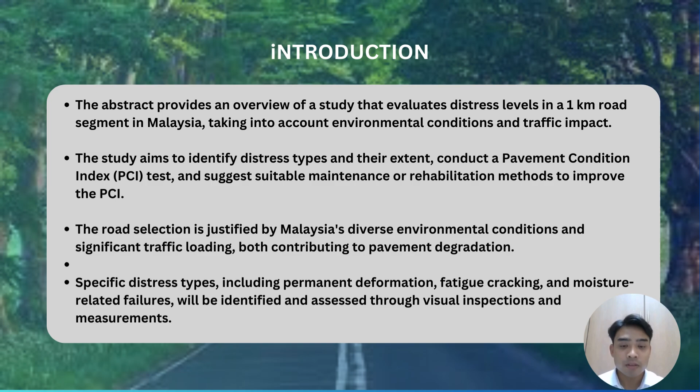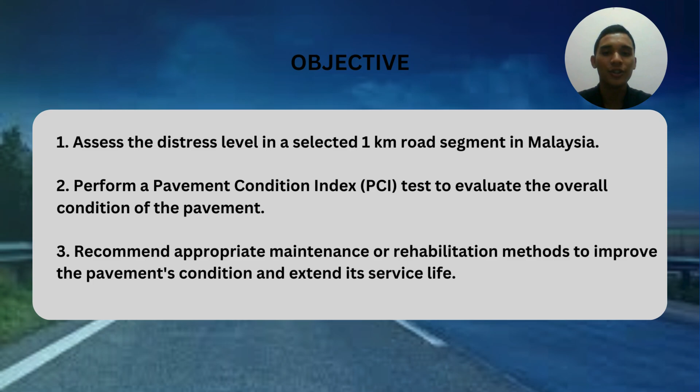My name is Muhammad Fikri Mafarid and I will talk about the location and study area of our case study. First of all, we must search and try to find a road in Parit Raja that has distress on that road. We pick and find the distress on Jalan Parit Haji Hassan, which is near SMK Seri Gading, and the road leads the way towards the city of Batu Pahat.

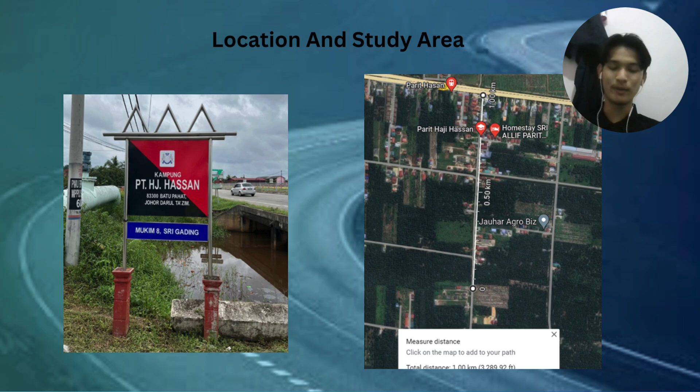Okay, for the problem statement, most of the Malaysian roads, including expressways and rural roads, were built using either flexible pavement or rigid pavement. For flexible pavement, we have 5 layers: subgrade, subbase, base, binder course, and the wearing course. For the rigid pavement, we have 3 layers only, which is the subgrade, base, and the concrete slab on the top of base.

For this study, the main road of the area of our case study is using a rigid pavement. Rigid pavement, or commonly referred to as concrete pavement, is a road structure that gives a hard and lasting surface for vehicle transportation.

This problem concerns highway engineering, particularly concrete-based structures, in regard to difficulties associated with rigid pavement. The major concerns include longevity of rigid pavement, in particular with respect to reducing distress, including cracking and degradation of joints.

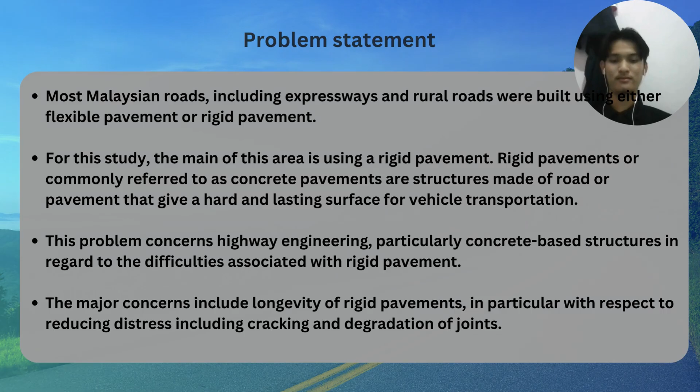Literature review. Pavement Condition Index, the PCI, is one of the assessments to know the condition of the road to help the process of maintenance and rehabilitation, which aim to sustain the quality of the road. The PCI method is used to obtain a PCI value for the road through a visual survey of the road that we do in our case study.

The more crucial factor is improved road condition, as it guarantees user safety and is safe for all users like motorcyclists, car drivers, and so on.

The PCI is a numerical rating of pavement condition that ranges from 0 to 100. In the PCI rating scale, 0 is known as the worst condition, and 100 is known as the good condition. When you get a PCI value between 80 to 100, it means that the road is safe to use and the condition is good.

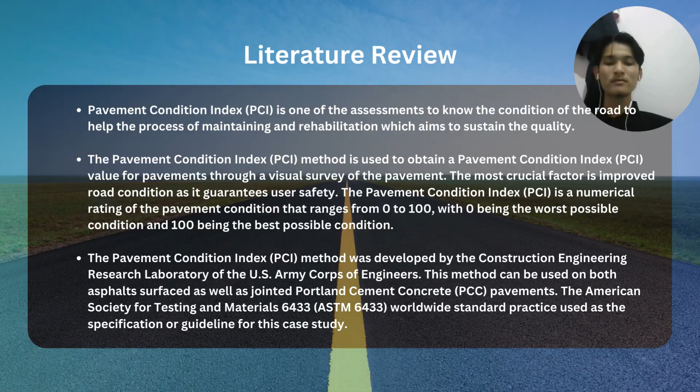Hi, Assalamualaikum. My name is Muhammad Nasir Tawwa bin Muhammad Razwan, and my registration number is CF220128. Okay, for my part, I will explain about the methodology for our project. Okay, the first one is start project.

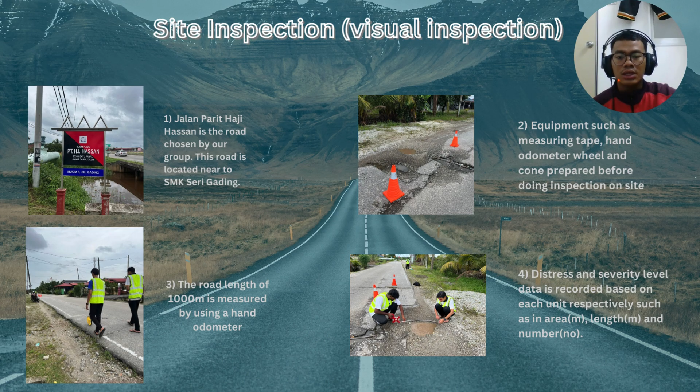Next is site inspection, which is visual inspection. Firstly, Jalan Parit Haji Hassan is the road chosen by our group. This road is located near SMK Seri Gading. Secondly, equipment such as measuring tape, hand odometer wheel and cones are prepared before doing inspection on site. Thirdly, the road length of 1000 meter is measured by using a hand odometer. The last one is distress and severity level data is recorded based on each unit respectively, such as area in meter, length in meter, and number.

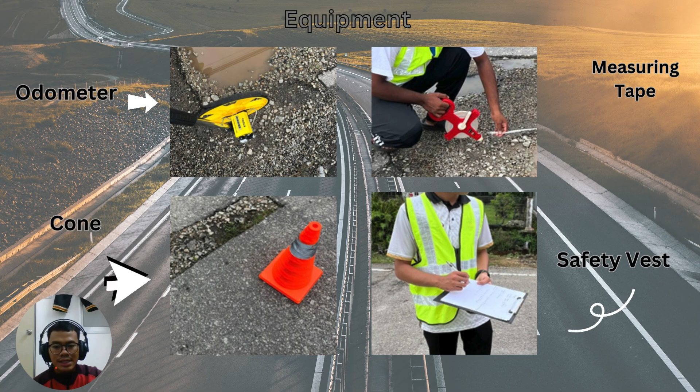Okay, this is the equipment used on site. First, we need an odometer, second, we need a measuring tape, and third, we need cones, and for safety we need a safety vest.

So hi, my name is Kishan son of Samugam. So today I will explain about data collection for our group.

So this is our data collection for our group. The first one is for sample one, where we get 11M. 11 is the meaning of the road condition, which is patching. M is medium. So there are four types of road condition: 11, 13, 02, and 08. 13 is potholes. We can refer to the table given, and we just have to fill up the table.

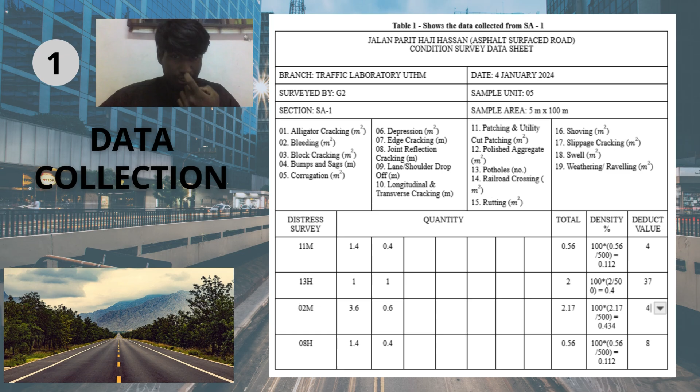So the quantity is the parameter that we get in the road condition. The total is the calculation. Density also uses a formula. And the deduct value is important in this collection because we have to refer to the ASTM graph. After I refer to the graph for the medium road condition, we get a deduct value of 4. The same goes for the other table.

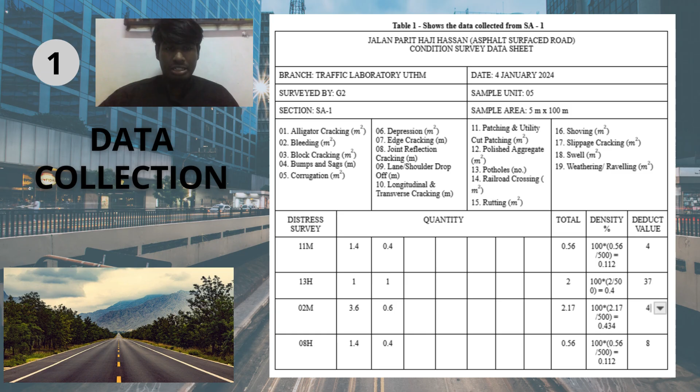So this is the data collection for number 2. For our project we have 5 samples: sample 1, sample 2, sample 3, sample 4. But for this explanation, I have just explained 2 samples. The same procedure was applied to collect the data.

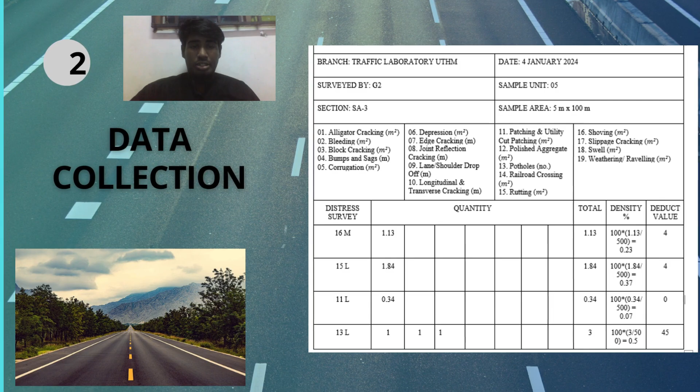So in this table we have to find the type of road condition and the type of distress that we found in the survey. Just fill up the table; for quantity we have the parameter, and the total is the calculation. Density also uses the formula, and the deduct value is the same, just refer to the ASTM for an accurate value. So that's all for our data collection.

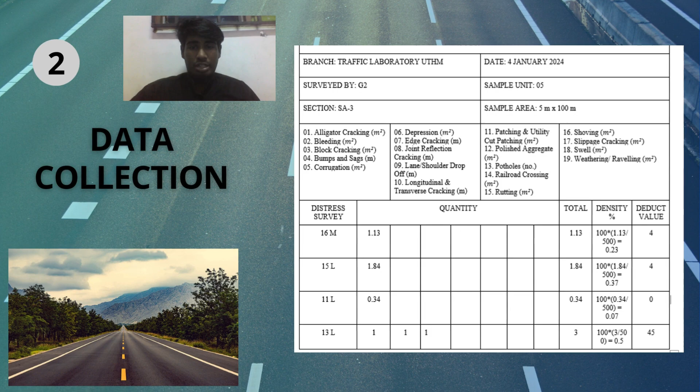My name is Muhammad Adam bin Muhammad Asmadi. My matric number is CF220192.

Okay, so this is our data analysis. We have five sample unit data. In this slide, I chose two sample units. For data analysis number one, the maximum allowable number of deducts is 6.79. The deduct values in descending order are 37, 8, 4, 4. So the number of deduct values is 4.

Okay, so based on the table, we calculate to determine the maximum CDV, which is 50. To determine the pavement condition index, PCI equals 100 minus maximum CDV of 50, and we get 50, so the pavement condition index is poor condition.

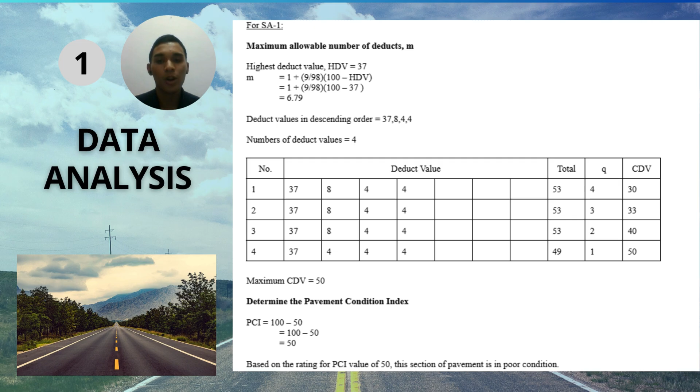Okay, so this is our second sample unit. Same as before, the maximum allowable number of deducts is 6.05. The deduct values in descending order are 45, 4, 4. So the number of deduct values is 3.

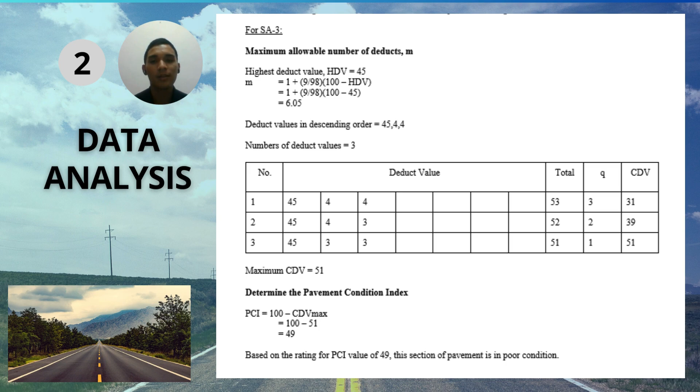Based on the table, the maximum CDV is 51. To determine the PCI, 100 minus 51, we get 49. So the pavement section in this sample unit is in poor condition.

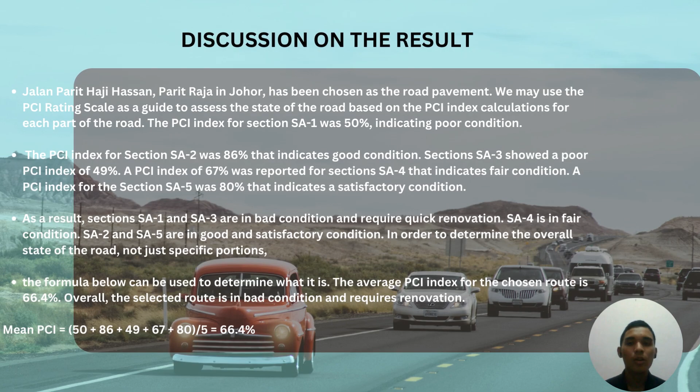Okay, so this is our discussion on the result. Jalan Parit Haji Hassan, Parit Raja in Johor has been chosen as the road pavement. We use the PCI rating scale as a guide to assess the state of the road based on the PCI calculation. The PCI for section SA1 is 50%, which is poor condition.

So as a result, sections SA1 and SA3 are in bad condition and require quick renovation. SA4 is in fair condition. SA2 and SA5 are in good and satisfactory condition.

Okay, so in this formula, the average PCI has been chosen, which is the mean PCI: 50 plus 86 plus 49 plus 67 plus 80, divided by 5, gives a mean PCI of 66.4%.

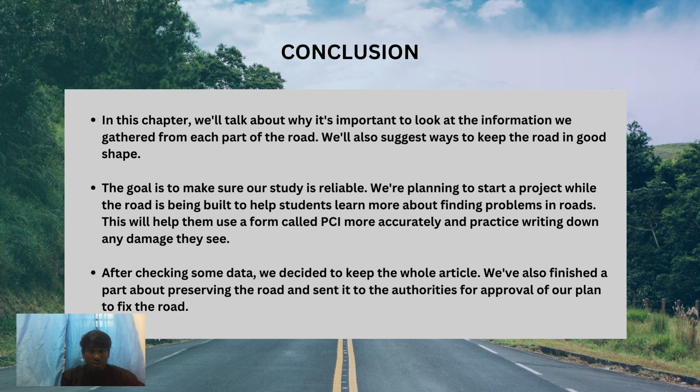We are planning to start a project while the road is being built to help students learn more about finding problems in roads. This will help them use the PCI form more accurately and practice writing down any damage they see. Lastly, after checking some data, we decided to keep the whole article. We also finished a part about preserving the road and sending it to the authorities to approve our plan to fix the road. So that's all from us.

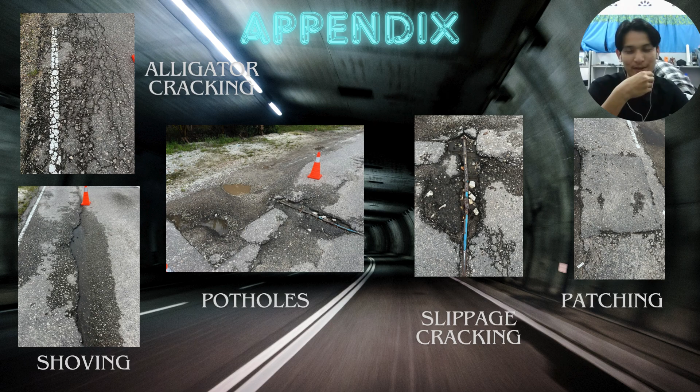Thank you. Okay, this is our appendix. As you can see, on our road we have five distresses, which are alligator cracking, shoving, slippage cracking, patching, and potholes.

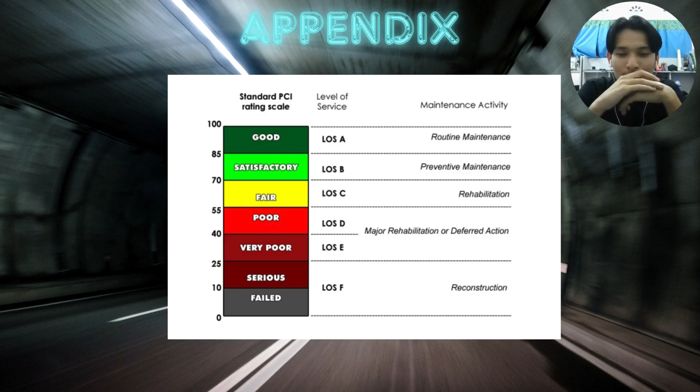Okay, this is our group appendix. This is our PCI rating scale. Good condition is between 85 and 100, and the worst is 0 to 10. This is what I said earlier. When you calculate the PCI value, you must refer to this so it is easy to conclude whether the road is safe to use and in good condition.